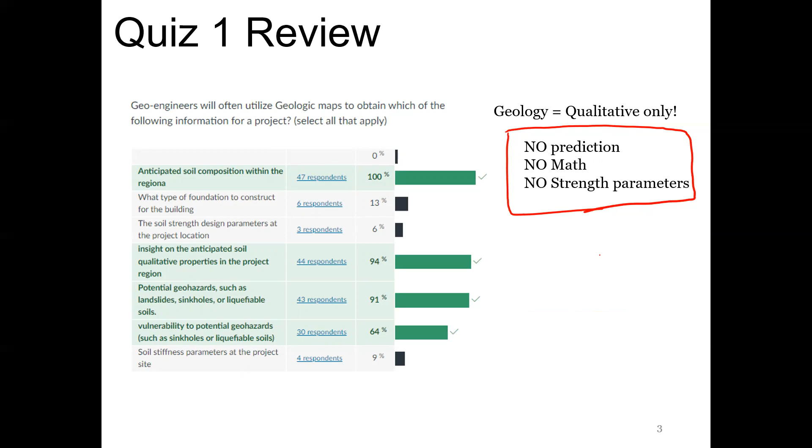All right, today we're going to be focusing still on the components and volumetric relationships. I want to cover and recover a lot of the things we talked about last Thursday, and go through that same example again, but a little slower and without writing, just so you guys will have it, because this material is really important. Understanding how to find the void ratio and all of those things are going to be important for the rest of the class, the rest of the semester.

So yeah, we'll be focusing on that. These are highlights from last week. Again, this soil phase diagram—although we have a conglomerate, a little mixture of solids and air and water—what we can do is summarize this into a 3-phase diagram.

So we have volumes of solid, volumes of air, and volumes of water. And then we also have the corresponding mass of water and mass of solid. This is a way of viewing and summarizing a soil sample, just by breaking it down into these three parts. For this class, we're assuming the mass of air is going to be equal to zero. So we only have a mass of water and a mass of solid, and that makes up our total mass or total weight of our sample.

We also assume that it's a homogeneous material, meaning the density is the same. The solid material's density is all just one density, and our water is the same density water. Even though in the real world soil grains can be different types of particle or mineralogy, and water can have different salinity or temperature, so a different density, for this class we're assuming homogeneous water and homogeneous solid.

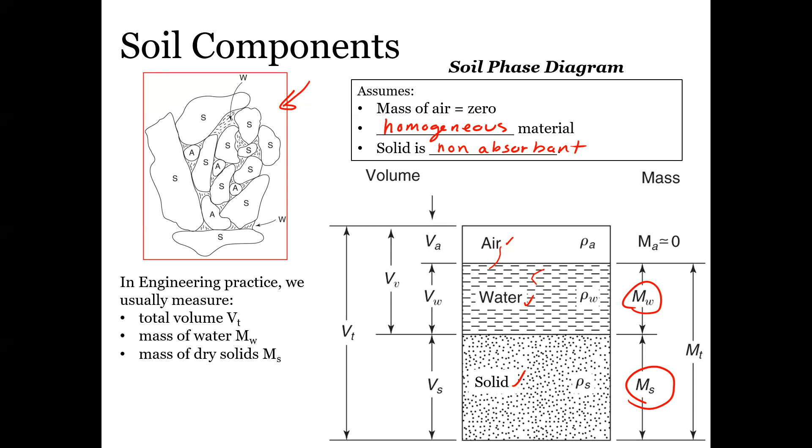We also assume the solid is non-absorbent. From our materials class, when we talked about asphalt, larger aggregate particles have macro pores and larger pore space where the binder or water can be absorbed into the aggregate, the chunk of rock. That's why we have different types of specific gravities, like saturated surface dry and so on. For this class, since the solid material is much smaller, just little grains of sand or clay, we're assuming, and it's safe to assume, that they don't absorb water. That's really important and it simplifies our equations. So the water is going to be completely separate from our solid material.

So the soil components - the reason we care about all these volumetric relationships is mainly because density and soil strength are correlated. Generally, as density increases, the soil is stronger. The reason we do these ratios and assign a quantitative value is because they describe physical characteristics of the soil. We're separating geology from geotechnical engineering. A geologist would say this has a lot of porosity or a high porosity, but we can actually assign a number to that and use it as a quantitative index for comparing soils and for our design.

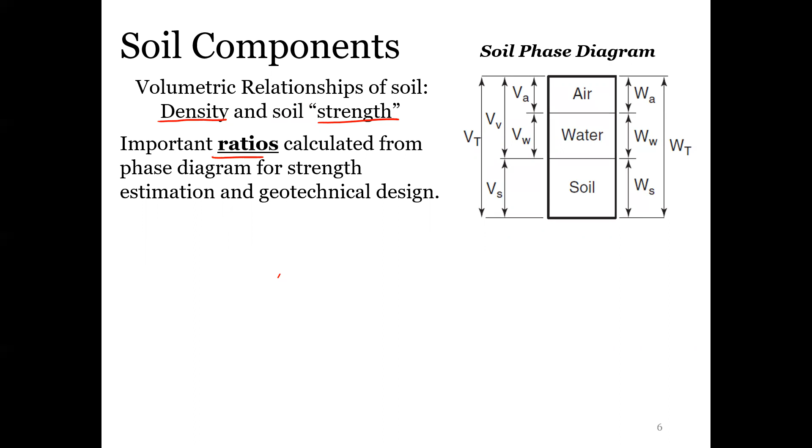These ratios also allow us to scale from the investigation size to the site scale, which is really helpful. That's where this lab comes in handy, because you'll see how we bridge the gap from performing experiments in the lab setting to applying that to an entire site. The void ratio, for example, is the volume of voids divided by the volume of solids. That, on a lab scale, can then be extrapolated to a site scale. So if we have a certain volume of soil at our project site, we can determine the total volume of voids at the project site, which could be used for storage of groundwater or anything else, like strength-wise or settlement estimations.

So some of these ratios we've already talked about: the void ratio, represented by E; the porosity, represented by N; the degree of saturation, just S. Porosity is shown in percentage, and degree of saturation is shown in percentage. We have our water or moisture content, shown either by W or sometimes MC, also in percent. Our unit weights are the gammas - we have gamma normal, gamma saturated, and gamma dry.

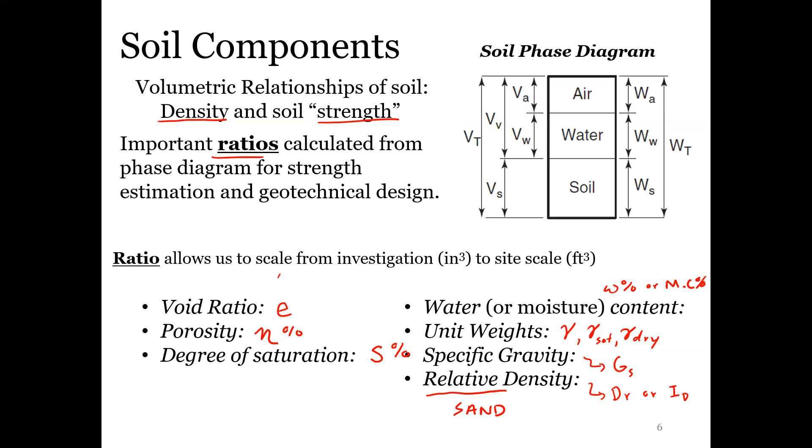Again, everything else aside from the unit weights is nice because they are unitless or in a percentage. So it doesn't matter which units you're in.

Just to keep in mind the specific gravity of solid, that number is saying how many times that material is denser than water. Thinking about a water bottle and how heavy a full water bottle is, if you're getting a specific gravity of like 100, that means that soil is 100 times heavier than that water bottle if it was the same size, which doesn't make much sense. That's some really dense soil. So again, it should be somewhere between 2 and generally 2.6 is the one that we will cover.

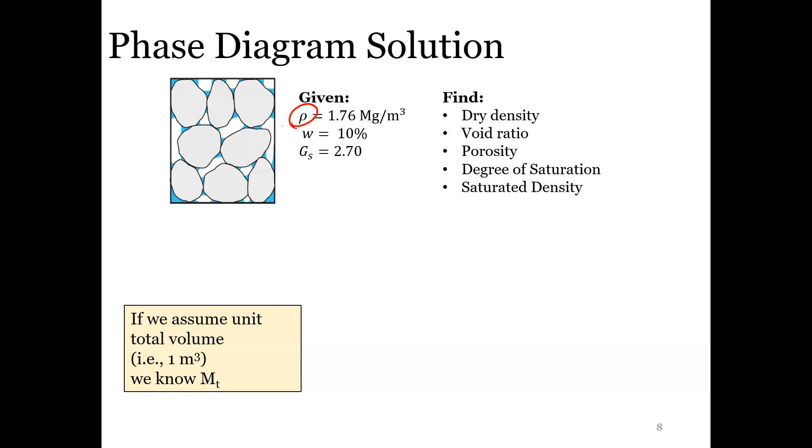So in this case, since the density is 1.76 megagrams per cubic meter, we know density is the total mass divided by the total volume. We assume a total volume of 1. Then we get a total mass of 1.76.

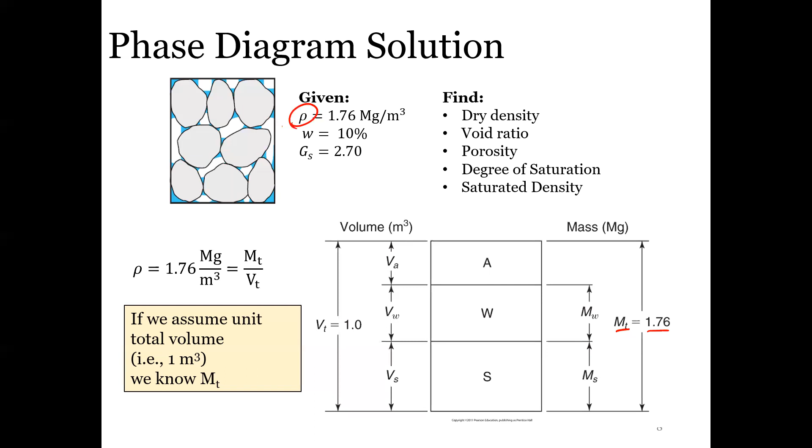So we've already worked on our outside here, right? Outside of the phase diagram. And now what we need to do is start solving for the things on the inside.

So what else do we know from this? We know that the moisture content is 10%. The big area where we're going to get tricked up again: moisture content, porosity, and saturation content are all expressed in percentage.

But whenever we're doing the math behind it, we always have to convert it back into decimals. So don't leave it in percentage form. The percentage is what you're giving your boss, your client, showing it in that form. But anytime you're doing the math, you need to bring it back into decimal form, so divide by 100 to do that.

And we know that the moisture content is a ratio of the mass of the water to the mass of the solid, so two independent things. That's why it can be greater than 100%. Most of the time we'll see it less than 100%, but it could be greater than 100%, so keep that in mind.

So for that, we can set up a system of equations since we know the total mass only consists of two things: the mass of the solid and the mass of the water, because again the mass of air we're assuming is equal to 0. So we have one equation from our total mass, and we have one equation from our moisture content.

Now we can solve for either mass of water or mass of solid by rearranging these equations. For example, mass of water is equal to 0.1 times the mass of solid. We plug that into our equation for mass of water. And we can get the mass of solid is equal to 1.6 megagrams, subtracting that from our total mass, and we can get our mass of water.

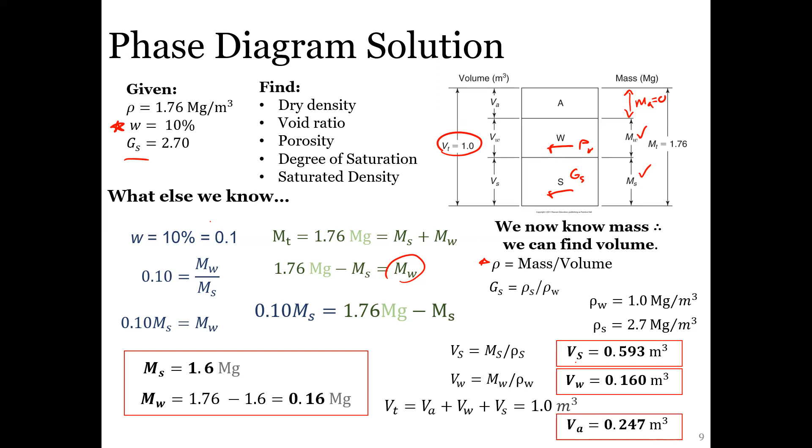So to find our volume of air, knowing that we chose to use a 1 unit total volume, and knowing that the total volume is solid, air, and water, we now know solid and water, so we can subtract those out to get the volume of air. Now we have all the parts we need. So now that we have a complete phase diagram, we can start plugging into these equations to solve for what's asked.

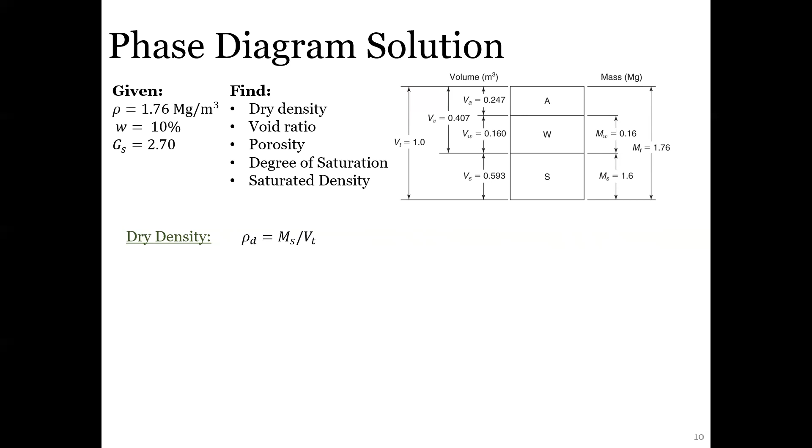First, the dry density, which is the mass of the solid divided by the total volume. Luckily we have all of those things now, and since we assume a total volume of 1, it's kind of simple. So our dry density is just going to be 1.6 megagrams. Always check that our dry density should be less than our natural density, because we are removing the water, so we're removing the mass but keeping the volume the same.

Our void ratio is the volume of voids divided by the volume of solids. These are two independent things, so it can be greater than 1. We have our volume of voids and our volume of solid. Important thing with the volume of voids: make sure you're including the volume of air, not just the volume of water. That equals about 0.686.

Our porosity, N, is the volume of voids divided by the total volume. These are two dependent things, so it can only be from 0 to 100. Our volume of voids can never be greater than our total volume, and again, volume of voids needs to include air and water. I see that a lot, forgetting the air if there is air in it.

That's equal to 40.7. And then degree of saturation is the volume of water divided by the volume of voids. Again, two dependent things, so the volume of water can never be greater than the volume of voids. All this stuff, 39.3%.

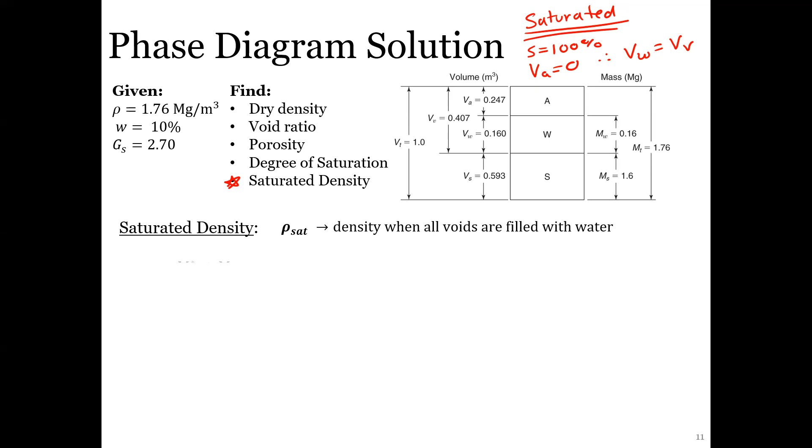Saturated density is when all the voids are filled with water. That's why I added this mass of water, like the hypothetical, the little asterisk here. That's when all the volume of voids is filled with water. So that's the mass of water that we currently have, this one right here, and then also the added mass of water that it would take to fill up those air voids.

So with the total volume of voids being 0.407, and knowing the density of water, we can find the mass of water needed to fill up the entire thing. That's equal to 0.407 megagrams, since we're using SI units. So our saturated density is 0.407 plus 1.6, divided by 1, that's 2.0. Double check: it should always be dry is the lowest, then the normal or moist, and then saturated. So you should always see it progressing in value—dry density is the lowest number, saturated density is the highest, because we're just adding water, adding mass.

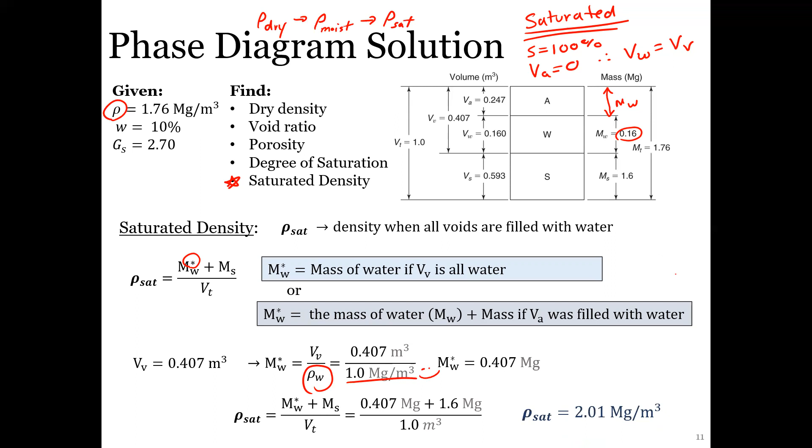But there is an alternate solution that is actually a little bit easier, and this helps us develop relationships for this phase diagram that you'll see in your textbook if you fast forward a few pages. So here's what we can do instead: if we assume a unit solid of 1 cubic meter. Before we assumed a total volume of 1 meter, but if we assume this as 1 meter, we can simplify it a bit more.

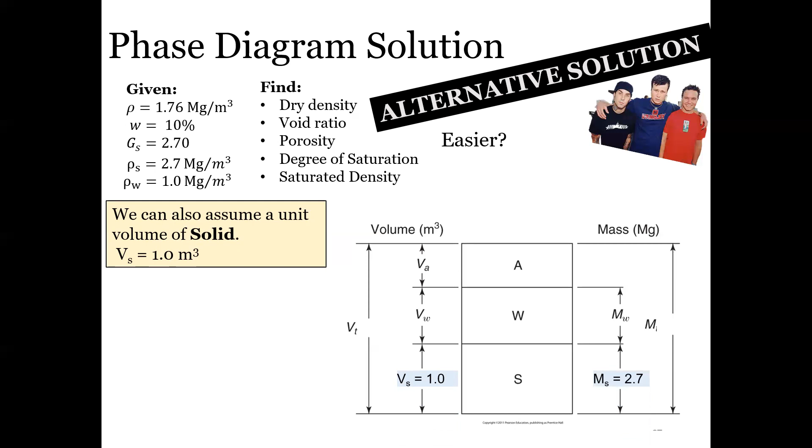If we do this, our mass of solid we can determine quickly because we know our specific gravity of solid is 2.7, still using density. If we have our volume of solid, same as before, but now starting with the volume of solid, so our mass of solid is 2.7. We know our moisture content relationship and our solid, so we plug that in and find our mass of water, which is equal to 0.27.

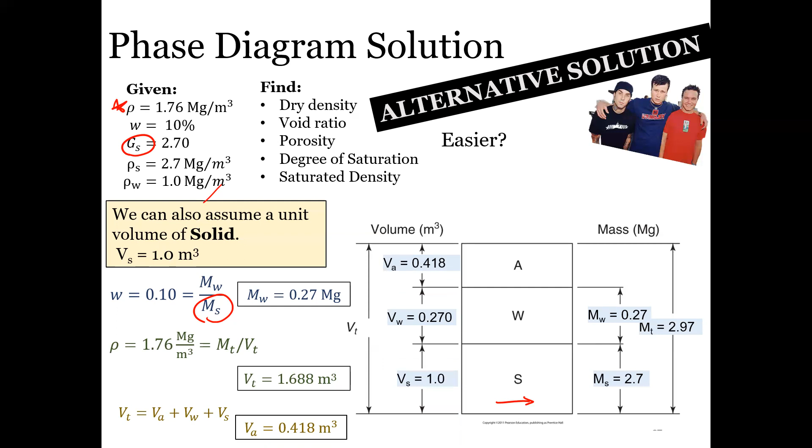So now we know our total mass because we just add those two things up: 2.97. Now on the volumetric side, we know the density is staying the same, so if we have our total mass, we can find the volume required, which is 1.688 cubic meters. Then we find our total volume the same way. There are different ways to do this, and the reason we do this is for our void ratio.

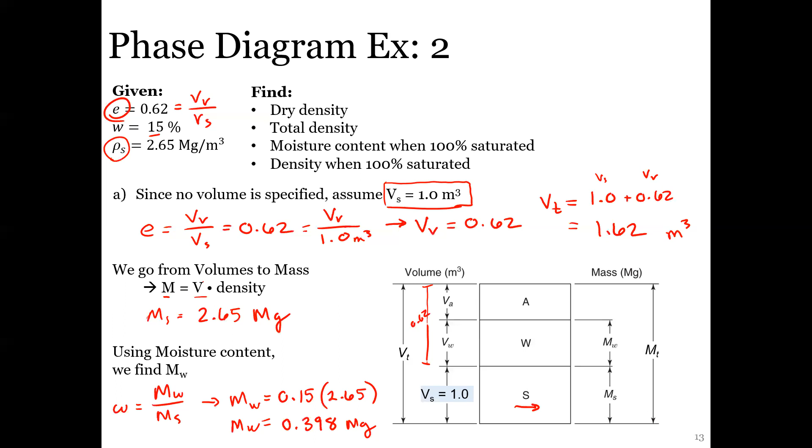So to find the dry density, we create a relationship equation that helps us find the dry density when we assume the volume of solid is equal to 1. We know the mass of solid is just the density of the solid times the volume of that solid. But for this, we assume the volume of solid is 1, so that means the mass of solid is equal to the density of the solid. We are already familiar with all that. Mass of solid is equal to the density of solid.

So we can plug this in, obviously the math right here. What we can see then is the total volume is just equal to 1 plus the void ratio, right? Void ratio here, 1 here.

So if our dry density is equal to the mass of solid divided by the total volume, our mass of solid is equal to our density, because this is equal to 1, our volume of solid, I'm just going to circle that. So this is equal to our density of solid. And then our total volume is equal to 1 plus the void ratio.

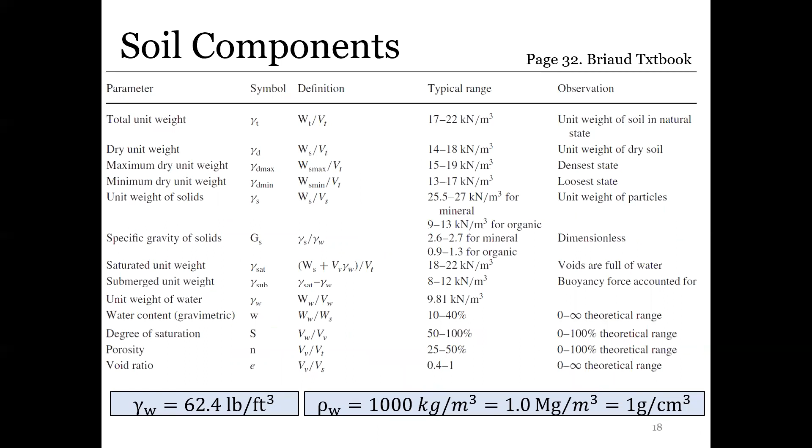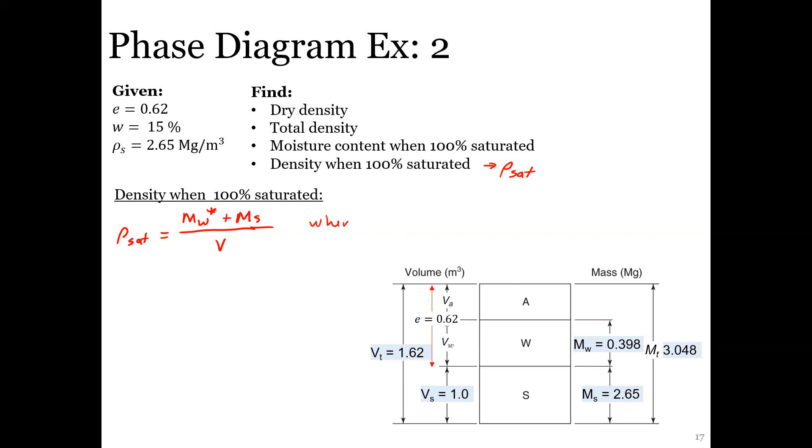And again, this is our saturated density. As you can probably imagine, there's also an equation that can be used for that too. So again, knowing originally what we had, saturated density is equal to the MW with that asterisk plus the mass of the solid, divided by the total volume. And that MW asterisk is that hypothetical case when VA is equal to 0, therefore volume of water is equal to the volume of voids.

So when S is equal to 100%, what we found from before is that MW is equal to 0.62 megagrams. So for our saturated density, this is actually 0.62 plus 2.65 for the mass per solid. This is equal to 2.02 megagrams per cubic meter.

So what we'll actually see here is, remember from before, we had this relationship. We can use this to determine our saturation still. If we find our moisture content in that saturated state, then we plug that moisture content into this equation and we can find our saturation. So this can actually be used both ways.

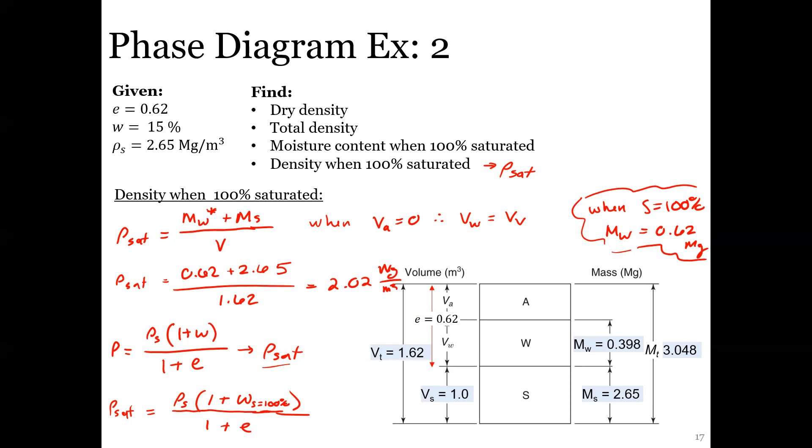And if we plug this in, you would see it's the same thing as before, the 2.02 megagrams from up there. So again, that's an important one that you'll see.

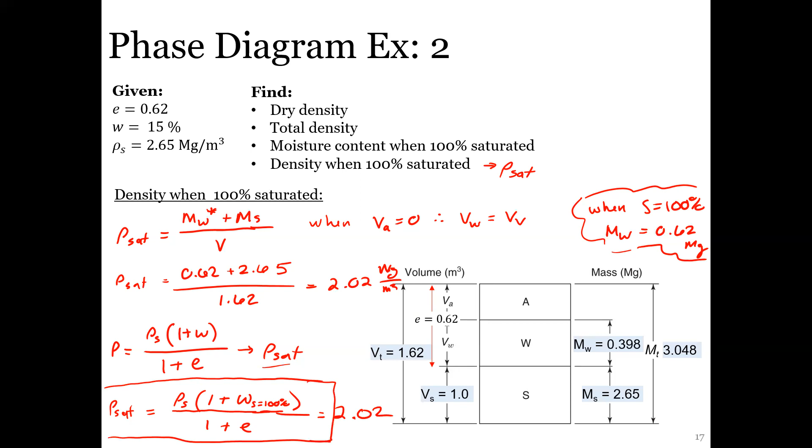So I already showed this, again the same ranges. What we know so far, we have our dry density, but now we also have this in a relationship with the void ratio. And although we assumed the volume of solid is equal to 1 to derive this ratio, this relationship is good for any type of soil, you don't have to assume anything. So if you're given a problem with the void ratio and the dry density, then we can find the density of solids, or vice versa.

You can use that in any case. We already know our void ratio. We also know that it is related to our porosity through this equation. That's another helpful tool: if you're given porosity, you can find the void ratio, and vice versa. The porosity is known, and again you can use this one to find either one, and the degree of saturation too.

For our total densities, know that in general our natural density is equal to the density of the solid times 1 plus the moisture content, and then we divide that by 1 plus the void ratio. That's derived from this equation, but it's still used regardless of our volume of solid. If we have a volume of solid not equal to 1, we can still use this equation, because that was just used to derive it.

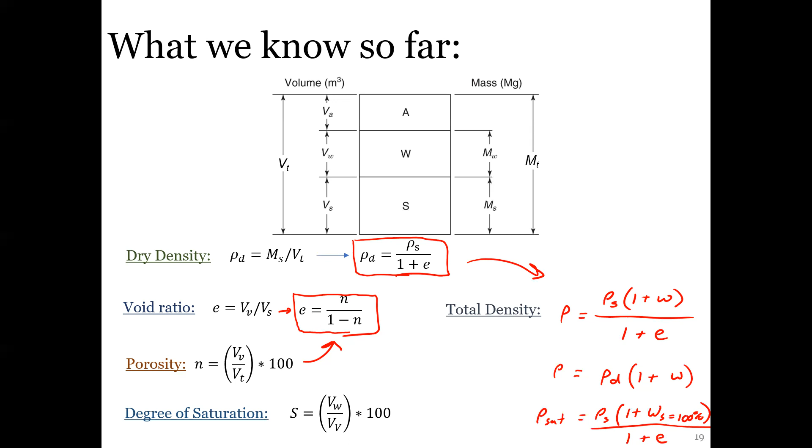And unit weights are gammas. Remember, gamma is just the density times the gravity, or the acceleration constant of gravity. So for all of these here, we can still plug in gammas and it's the same relationship. Just remember that, they're used interchangeably, because we're just multiplying gravity by both sides, and so it cancels out.

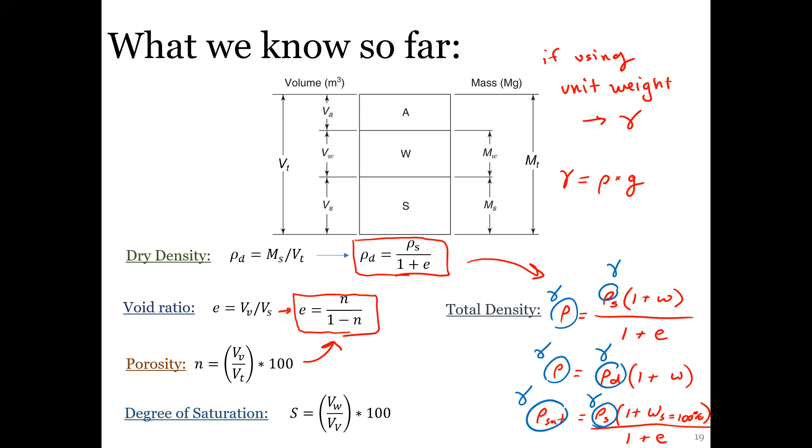Since we see that these are all kind of related, and you'll see that there's a lot of correlations between the two, understanding how to fill out the phase diagram is important, but there are relationships and equations you can use. There's one super important one that is a relationship between pretty much all the parameters you will need as a geotechnical engineer. So let's see how we do this.

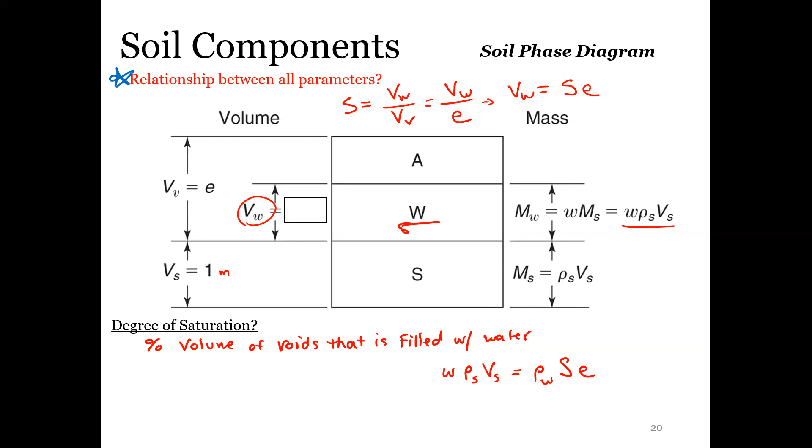So saturation, this is just the percentage of the volume that is filled with water. From this, if we know our mass here, our volume of water, and since we are assuming this is just one cubic meter, for example, we know the moisture content times the density of solid times the volume of solid from right here is equal to the density of water times the saturation times the void ratio. Because again, the saturation S is equal to the volume of water divided by the volume of voids. So this right here, if our total volume of voids is E, our volume of water is equal to S times E. That's where this value is coming from, right here.

So if we manipulate these around, knowing the density of water is 1, and the density of solid is GS, our specific gravity, basically the relationship it boils down to is this: our specific gravity times our moisture content is equal to our saturation times our void ratio. So really basic equation, but super helpful to relate these four terms.

A way that you could remember this, you can show it in a bunch of different ways. The way that I remember it is this: SE equals WG, so it says 'sewage.' So SE equals WG. There's another one.

Let me write it in a different color. This one is not historically correct, but you could say George Washington equals soil engineer. I don't think there's proof that he was a soils engineer, but there wasn't proof that he wasn't, so we can just go with that. So GW equals SE.